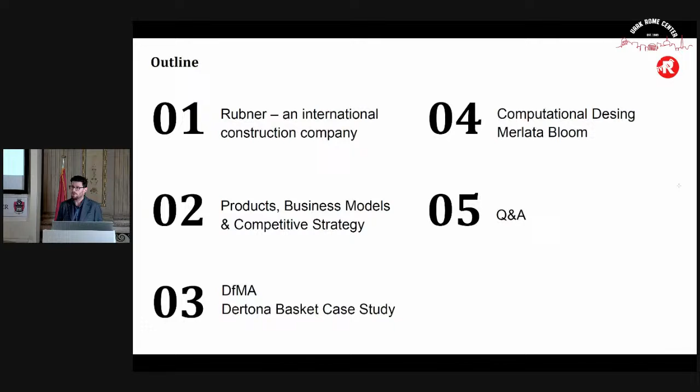The first one is the sport hall of Dertona Basket, using the DFMA approach of design. Then we will have a brief look at the Merlata Bloom, the largest shopping mall in Europe, recently completed in Milan, where we took part in the design using a computational design approach. And then I hope we can have a fun part with questions and answers.

Let's start with the Rubner Group. Rubner is a group of 24 different affiliated companies working in the field of timber engineering in Europe, although we are an international company because we are quite active in the entire world. These 24 affiliates are placed in 15 different locations and 4 countries. We are more than 1,500 employees, and we have a total turnover of more than 400 million euro.

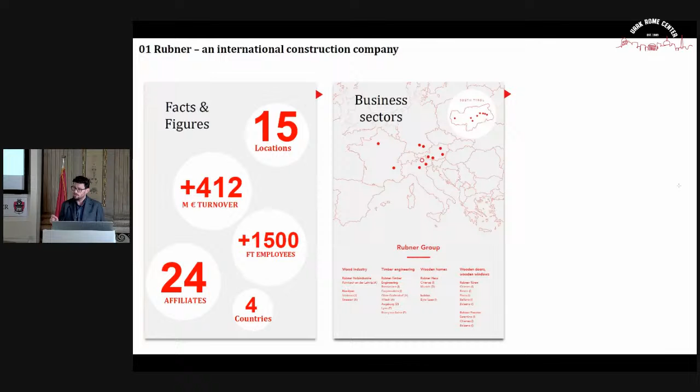These 24 different companies are grouped into 4 different business segments. We have the first part, the wood industry, those companies that take care of the raw products. Then we have the sector of small single family and double family houses, namely residential application. Then there's the part of the company that produces finished products such as windows and doors, very high quality level windows and doors.

And then there is probably the most interesting part of the company, not because I'm working for that, but because of the type of structure we take care of, namely tall buildings, large span structures, iconic buildings, or whatever is called timber engineering. What is extremely interesting and makes us unique is that the 24 companies, although they make business from a standing-alone point of view, must be profitable.

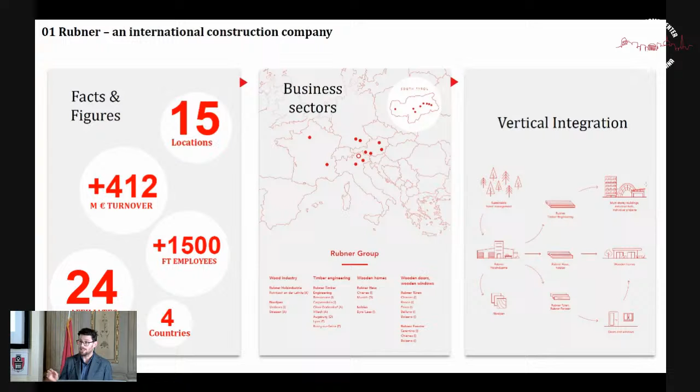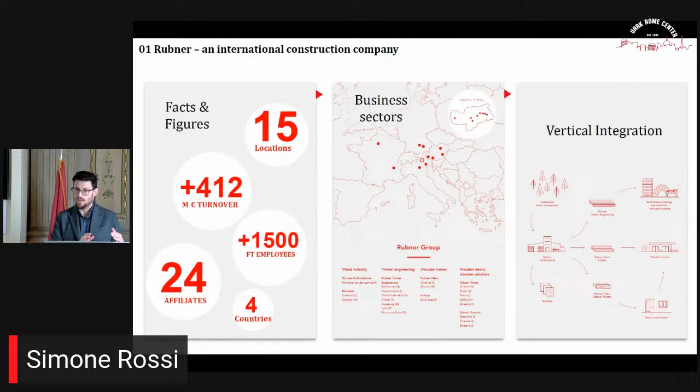We are vertically integrated. Here you have a small picture showing more or less how we work. We take care of the forest, we manage it, we own it, we take the log, we produce the lamination and the raw material, and then all along the value chain, this raw material is taken up to a finished configuration: building, window, door, or whatever.

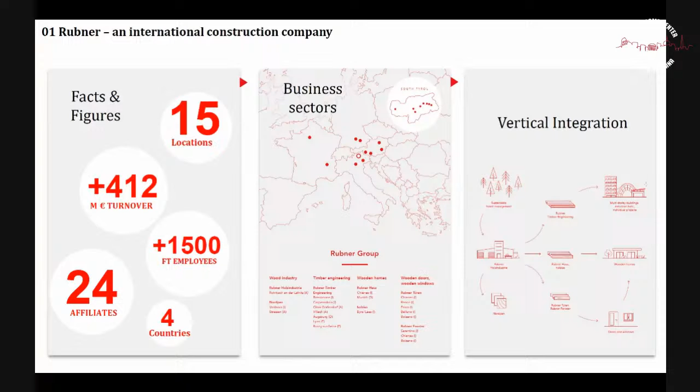What are our main products? So basically, the raw material is wood, timber, engineered, made of larch or Norway spruce. We produce glulam beam, GLT, cross-laminated timber, and then framed elements. These three base products can be combined.

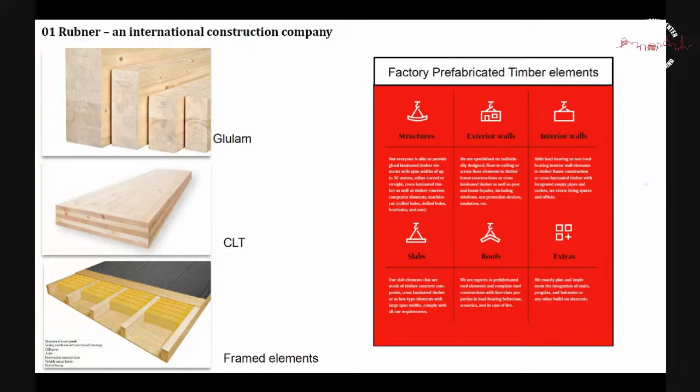We combine them into different applications in the factory, in the workshop, creating a semi-finished product, a kind of kit for structure, for exterior wall, interior wall. Namely, a staging between the final configuration and the base product. This activity is pursued through 4 common steps, generally speaking.

We start working with architects or the design team of the client with the conceptual design, working shoulder by shoulder. Then we further develop the design, the planning, the project management, the production, direction, and the installation. This activity that works on those 3 base products is basically articulated toward 4 main business models. These are the more important business models for us.

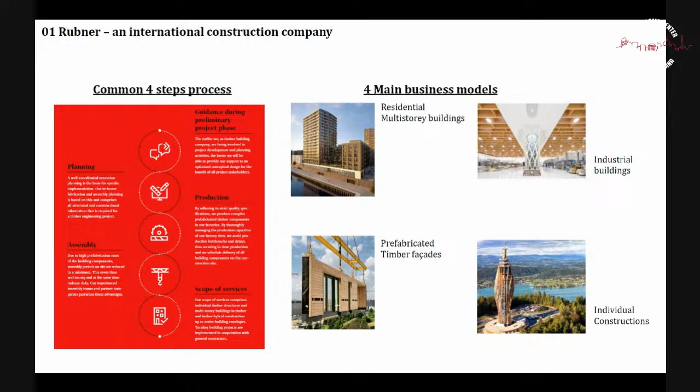Residential multi-story building, and the picture you are looking at is the tallest timber building in Germany, recently completed in Hamburg. Then we have industrial building. This is the headquarters of Tetra Pak in Italy. We have prefabricated timber facades and also individual construction.

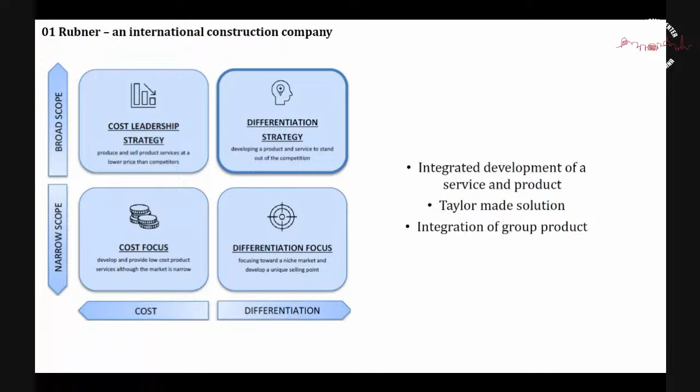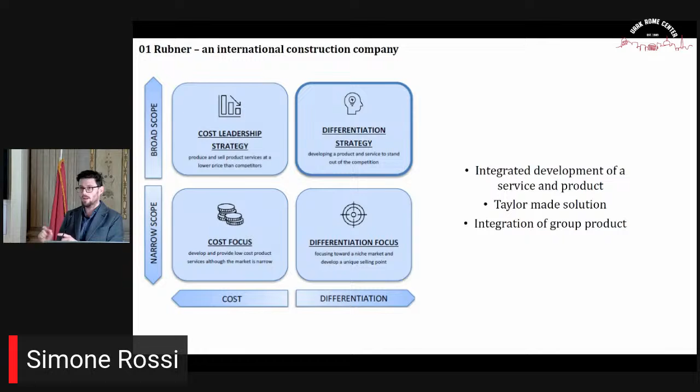From a strategic perspective, maybe it's not that common as a description. Using the Porter generic model, we as a company pursue our core competencies through what is called differentiation strategy. Each company is making business addressing 4 perspectives. We are looking at differentiation strategy because we are quite good in integrated design, in developing tailor-made solutions, addressing the client expectation, and also the integration of the group.

What does differentiation strategy mean? It means that we are targeting a wide sector of the market. That is why we are active in the entire world, but with a different approach. We are not a mass producer, although our production is quite high, but we try at the beginning of the design to understand what the architect, the client, the design team is looking for, and we try to develop our base product, the kit, to successfully make the client happy.

This is quite high-level as a description, but basically, what do we do, especially in the technical office, the office I'm leading? We work on the conceptual design, the preliminary design, the engineering design, and the final design. What is called integrated design from the beginning up to the direction. In a nutshell, what do we do? We take an idea, start working with the architect, shoulder by shoulder, and try to make it real.

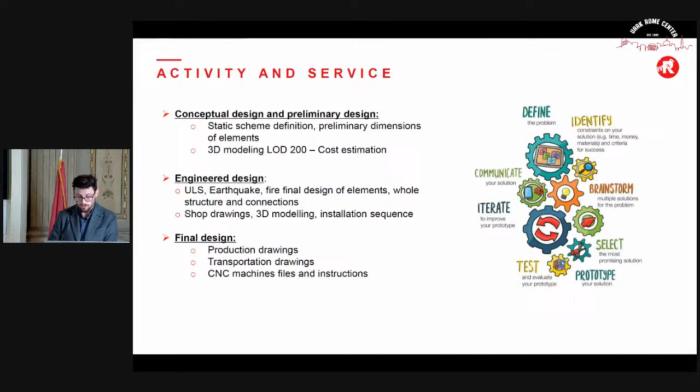And that is the picture of... there is a delay.

Okay, sorry. We try to create what the architect is looking for. That's the Azerbaijan pavilion we developed for the Expo 2021 in Dubai. Looking at the picture, everything seems quite easy, but it is not, because we are a designer, a producer, we install it, we help the client to maintain the building.

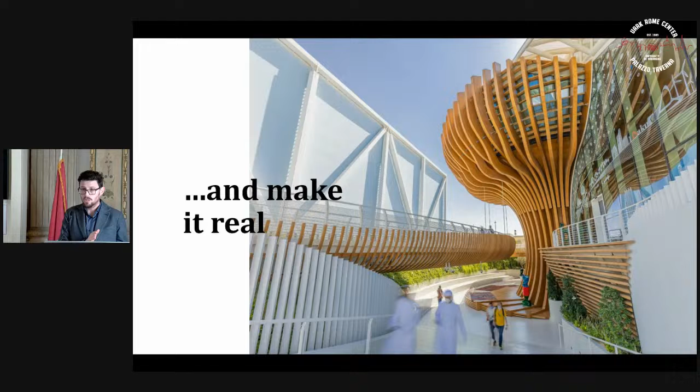So I let you imagine how difficult it is to take products through the entire world. It is physically a nightmare because of customs duty, specific regulations. You have to fit everything in a container. So although the pavilion or the structure is quite large and tall, you need to split every piece into smaller pieces, at maximum 11 meters long. We also need to design every single nail, steel hardware, whatever there is in the building.

Yeah, okay. Sorry, there is a delay. I'm looking at the screen.

I apologize. We need to design everything because, as I told you, we are developing a tailor-made solution. We cannot use off-the-shelf hardware. There are thousands of different producers that produce angle brackets or the like. But if Rubner would like to address the client expectation, the architect expectation, we need to design also the very small base plate or steel hardware.

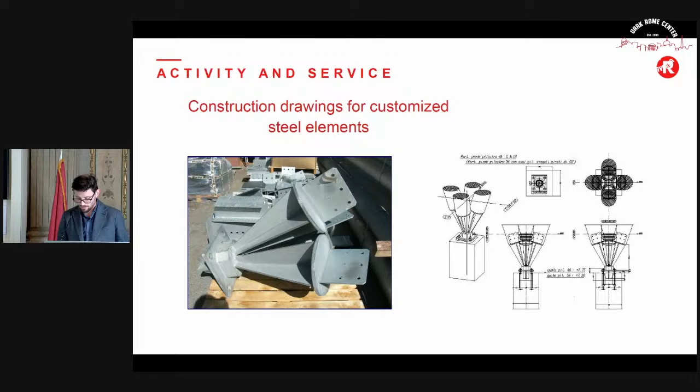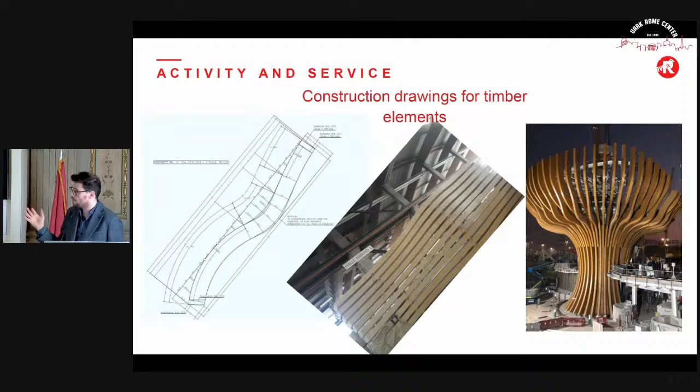Not only that, there are limitations in the production. That is the pavilion we have just seen. It consists of several different branches, each of which is different from the other. And the curvature of these elements is smaller than the real production capability, because, leaning toward the engineering part of my brain, whenever you bend a piece of timber, you are introducing a stress. And if from the beginning you introduce a stress, you are actually decreasing the load-bearing capability. Thus, there is a limitation.

In this case, many of the branches were too narrow for this limitation. So if you look at the picture, at the pointer, you can see in this zone 3 different lines. The first one was the line in the final configuration, the radius that the architect wanted for the branches, and the other one was the dimension of the raw piece, and then we carved out everything.

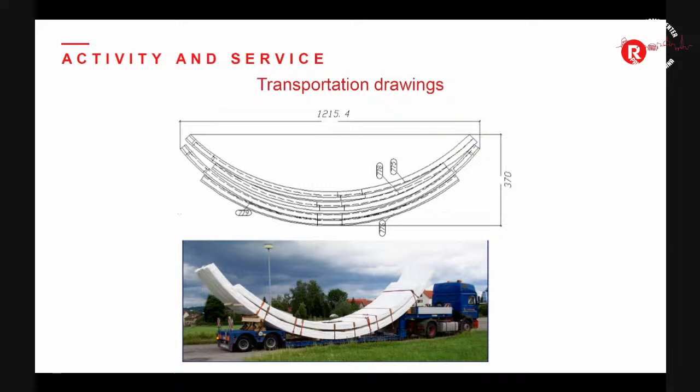This is extremely challenging from the point of view of the drawing, the fabrication, but also from the structural design, as timber is a fiber material, and you cannot cut the fiber, otherwise you are diminishing quite importantly the ability of the piece to take load. And not only that, we have to take care also about the transportation, because you cannot design the building without taking the piece out from the factory and onto the road, on the boat, or sometimes with the helicopter.

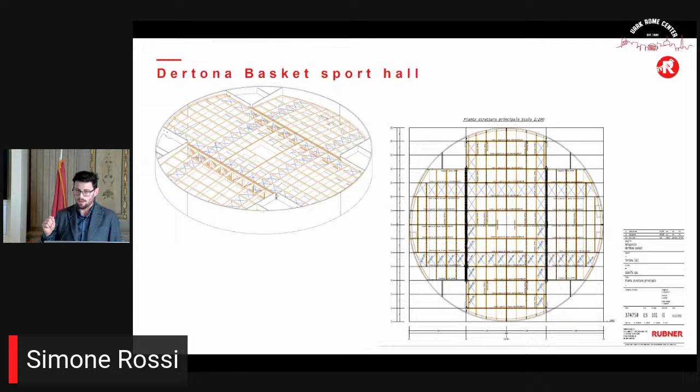Okay, first case study. I'm going to present the Dertona Basket Sport Hall. We developed it with the design for manufacturing and assembly approach. It's a quite interesting structure, and it is going to help me explain how we work, how we can trace everything, how we can organize everything. You're looking at an engineering drawing. We designed and installed the roof of the sport hall. It's a dome, 80 meters in diameter, so quite big. That's a screenshot of the drawing we exchanged with the client, so it is physically a part of our design.

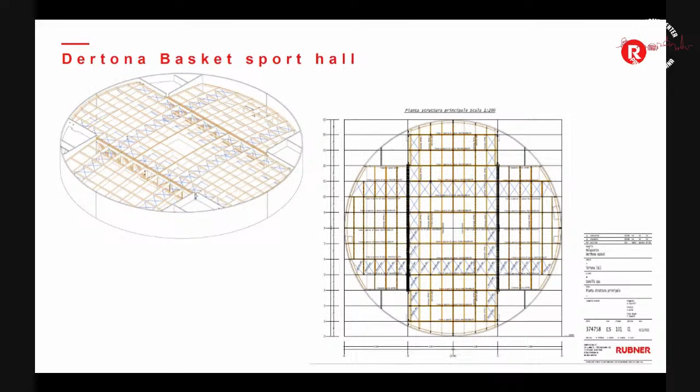The roof consists of 2 main trusses. Here on the left picture, you can see them here on my pointer, that are taking the load of the entire roof. We have 3 bays. The central one is 33 meters large. How do we get to the final project? Through the drawings, but also the structural calculation.

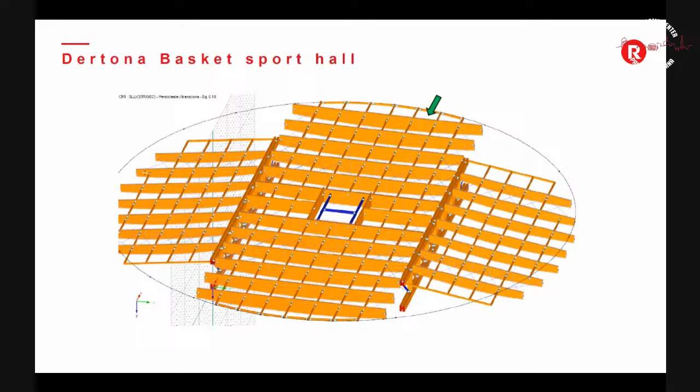This picture is showing you the final finite element model that has been quite complicated to correctly model and consider the interaction between the foundation, the concrete shaft, the concrete shell, and also the roof, as the Dertona Basket is playing in Pavia, a quite seismic prone region in Italy, thus the seismic action led the design. Another picture of the finite element model, so you can also see that there is quite a superposition between the structural design and the drawing design.

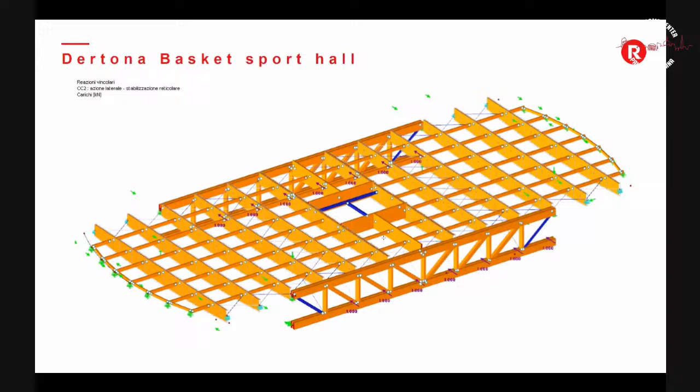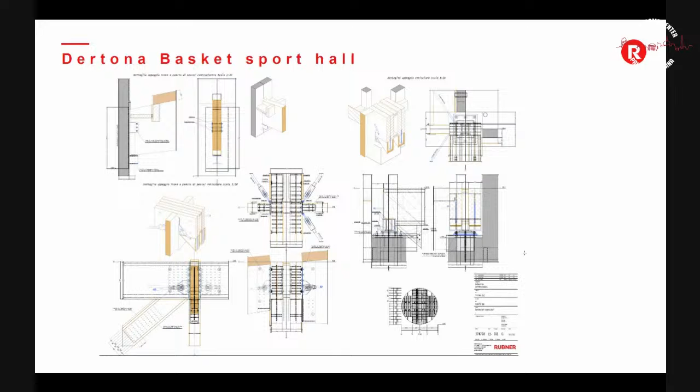This activity ends with the development of a 3D model that is not actually only a 3D model, but is what we call a digital twin. You are looking at the shape. I took a cross-section, and you are looking at the real structure. But this is a model. It is a pivotal item for our activity because it is used to take engineering drawings to the client, so you can extract the drawing, but it holds all the information, not only for the timber, because it is used for the clash detection, to order all the material, so make the bill of quantity.

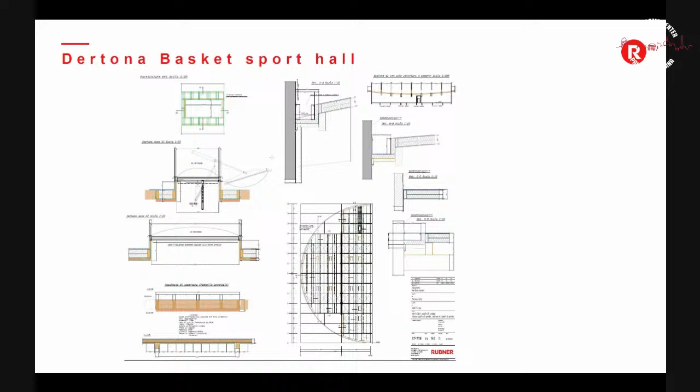Is this a sort of BIM or is it more than a BIM model? Actually, it is a BIM model. We use a proprietary software that can communicate with the CNC machine, but it holds a lot of information, such as color, strength class, type of timber, when you need it on site, what is the name and family name of the element, everything. That is why I call it a pivotal element. And thank you for the question.

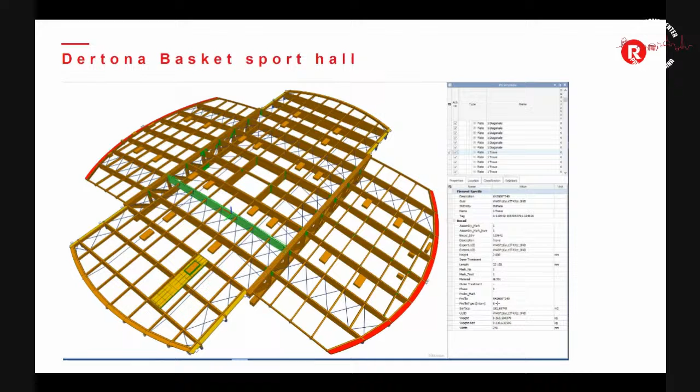Here you have an example. This is the final configuration of the model. I highlighted this green beam, and it's not that big, but on the right side, you can see that we have all the information about this beam. I can interrogate the model, and I know that this beam is 24 centimeters wide, 2.6 meters tall, 32 meters long, and is made in glulam GL30C. I know that there are five elements in the building of this type of beam, and also the assembly mark. It is not only used for the installation, but also for the production.

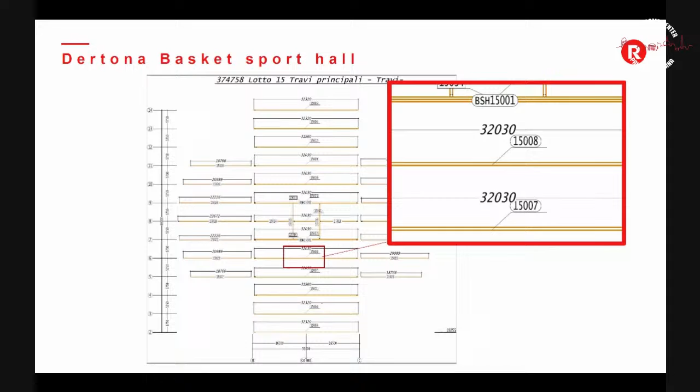That's an engineering drawing. If we look at that beam, here you can see that that beam has a positioning number 15008, and this is needed to instruct production to create that beam. So we need to provide our production with what is called a press bed. Press bed, or Pressbetten in German.

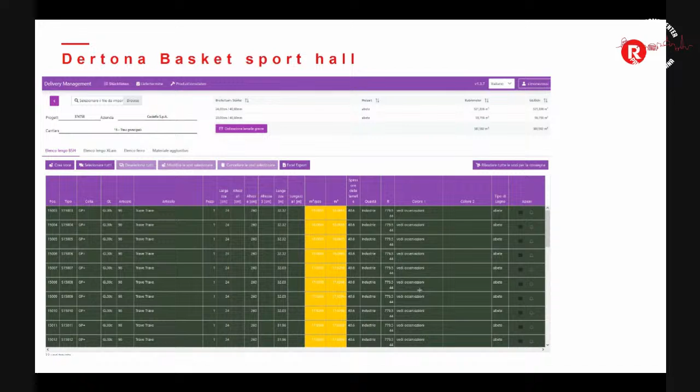So namely, you need to instruct the production what is the shape of the beam, how long is it, how much does it weigh, and also in our logistic system 15008, you see here, once again, I know the type of timber, type of glue, how much does it weigh, how long it is, when I need to have it on site. So everything is taken under control with this pivotal element.

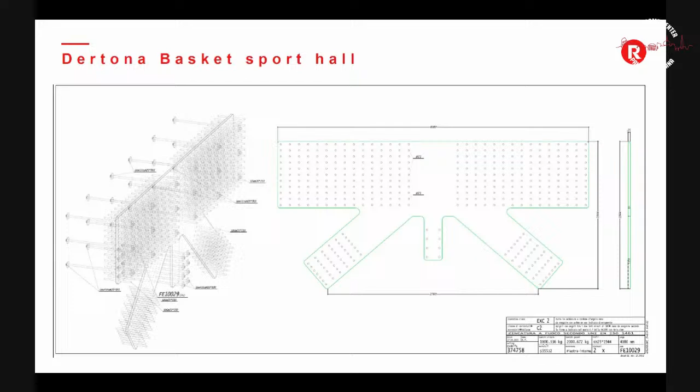But not only on timber elements. We need to do the same also with the steel hardware. You see that is the central steel plate for the truss. Maybe it's not that easy to read it for you, so I can help you. This small guy is 4 meters long to connect the two pieces of the truss, and it weighed 1 ton, 800 kilograms. That's the digital representation of the element, and I took a picture of it.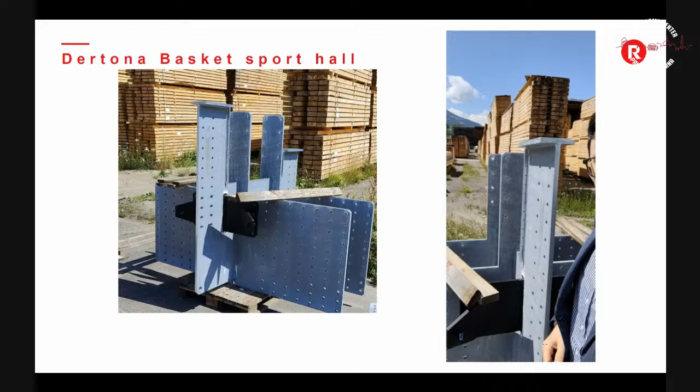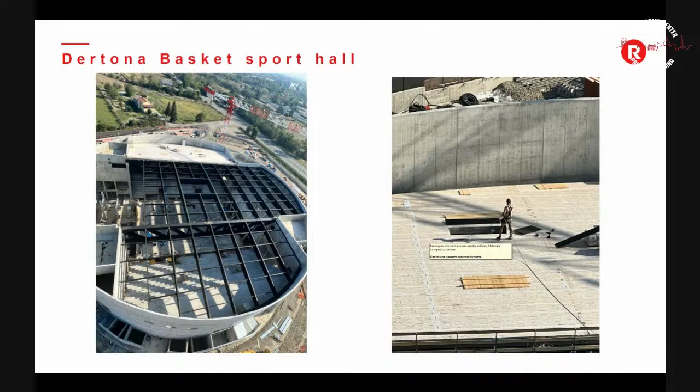Then everything is taken on site, assembled, then we tilted up the truss and put it in its final place. I have a couple of pictures in order to make you understand and feel how big it is. So that is the dome. And if you look at the pointer, I just took a snapshot of this zone. So here we have our carpenter working on the roof. So you can physically feel how big it is. And finally, a small video of the erection site that one of our carpenters took during the installation.

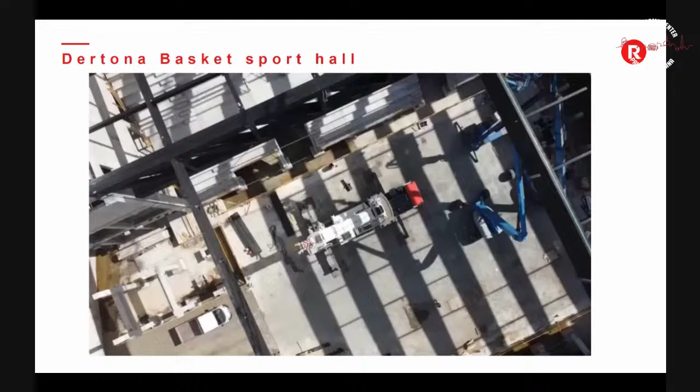While looking at it, we always struggle at the beginning of the design because usually we get on site later than other contractors, and you need to agree with the partner on site about the lifting equipment. So you need also to take under control the weight of the element and how far the weight is from its final configuration. It's not such an easy task actually. And although it probably seems a detail, it is not.

Okay, other example. I'm going to present you the Merlata Bloom Milano in Milan. This is the largest shopping mall in Europe. We have been quite lucky, let me say that, to work on it, although it has been quite a nightmare. We worked on it 3 years, and we addressed the final request of the architect and the client using a computational design approach. But first of all, I would like you to see the beast, or the snake, let me say that, because there is this delay again, sorry. What can I do? Oh, here we go.

That's the shopping mall. It consists of 2 pieces, 2 big buildings, and we designed and installed the Winter Garden, the gallery connecting the 2 buildings. You see this part that is quite big, but one of the biggest headaches we had is that this part of the structure is overtaking the A4 motorway, the largest motorway in Italy. So we had to install and take care of the safety of the people on the building and also the cars underneath while installing it.

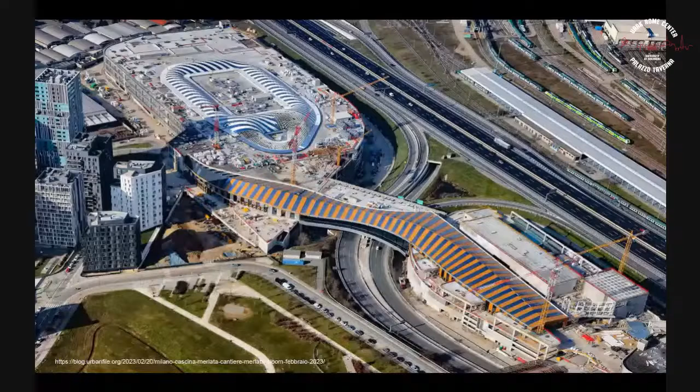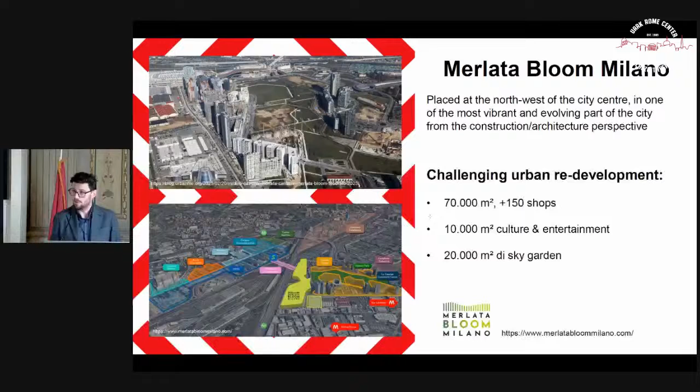A couple of information. This shopping mall is placed in the northwest part of Milan, close to the Expo 2015 zone. That is quite a vibrant part of the city because a lot of construction and architectural activity is taking place there. As I told you, the building is quite big. A couple of numbers I took from their website. The building consists of 70,000 square meters of shops, 150 plus shops. 10,000 square meters are dedicated to installation, culture, and also entertainment. And then we have also 20,000 square meters of sky garden. Probably for what is usually done in Europe, it's quite a big and massive activity. It's larger than normal.

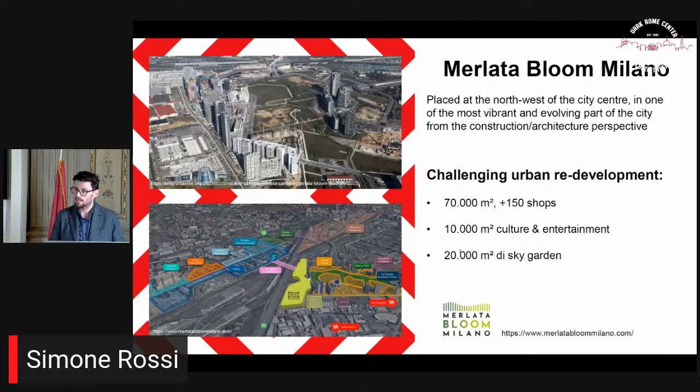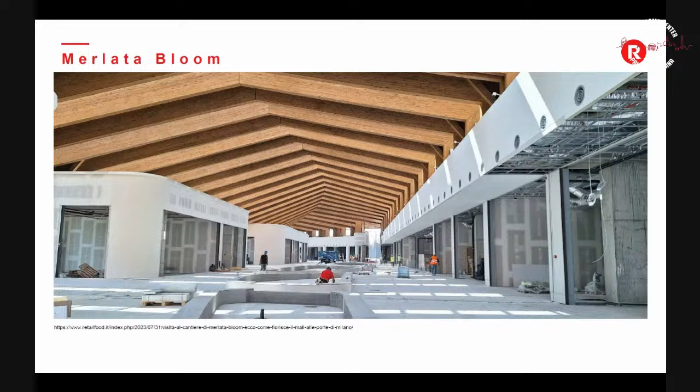But more important is the shape, because if you look at the projection in plan of the building, we will see that we have a double curvature. And then if you look at this picture, we have the ridge line and the gutter line that are going up and down, but not consistently. Why is it so important for you to understand that? Because if you take 2 portal frames, place them one close to the other, and then you change the inclination of those elements, and then you consider projecting them on a curve, you end up with a surface that is not actually a surface.

It's a kind of warped surface to be covered with another piece of CLT. So not that easy at all. I can give some numbers, some key facts. The gallery is 300 meters long. We have 106 three-hinged frames, each of which is different. So 106 single pieces with a maximum span of 37 meters.

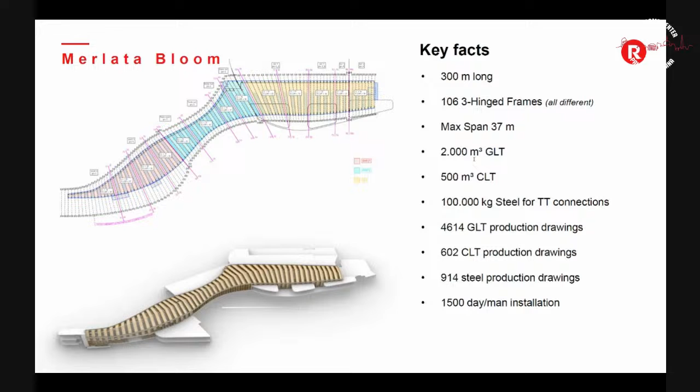We used a total of 2,000 cubic meters of glulam. Just to give you an idea, one full truck can load 50 cubic meters. So we are speaking 2,000 against 50. I let you imagine how many trucks we moved from the factory to the center of Milan. 500 cubic meters of CLT, and then 100 tons of steel, custom, self-designed brackets for timber-to-timber connection.

To do that, me and my guys worked on more than 4,500 drawings. I let you imagine the effort, the energy, how many pills I took for the headache to develop it. 600 single piece drawings for the CLT, 900 drawings for the steel production. And just to give you an idea, it took 1,500 man-days for the installation.

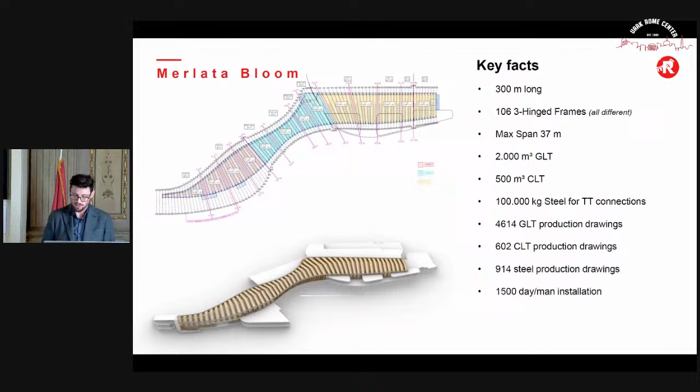If this is not enough, the building is divided in 3 sections. We have the bridge that overtakes the exit of the motorway, and then we have the east part and the west part, because the entire structure is overtaking 2 seismic joints, because Italy is quite a seismic-prone region.

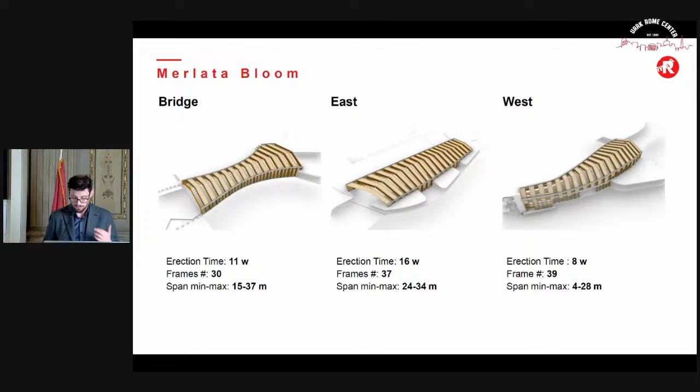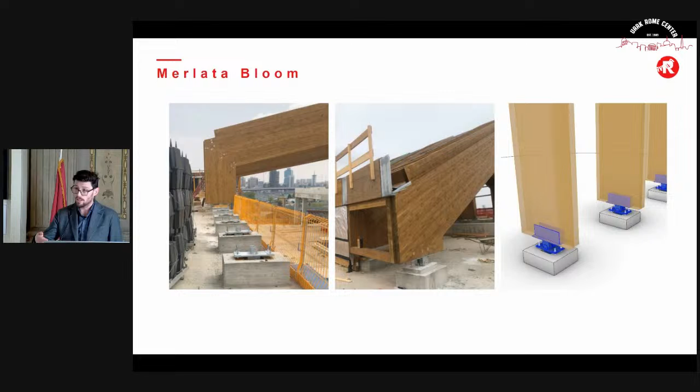This is another picture that is helping me to let you understand what is our work and how we addressed it. Here on the left, you're looking at 2 pictures of the same detail, because we are looking at the base plate of the frame. And then here on the model, we have the typical detailing, but it is changing portal with portal, because I already told you that each single portal is different.

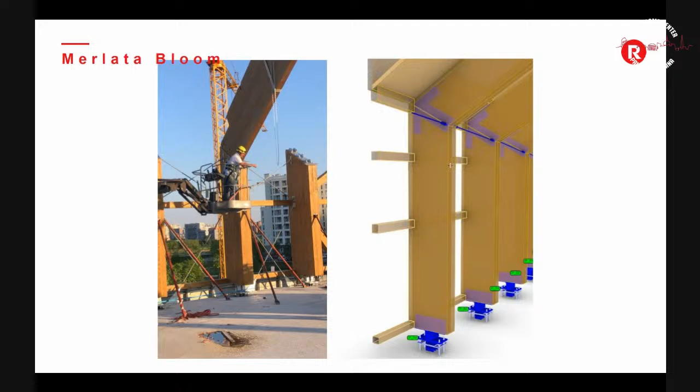Similarly, at the knee, we have a rigid connection that is taking the force from the beam to the column. So we have a typical detail, but point by point, the detail is different. And there is here a picture showing you the gutter line and the connection.

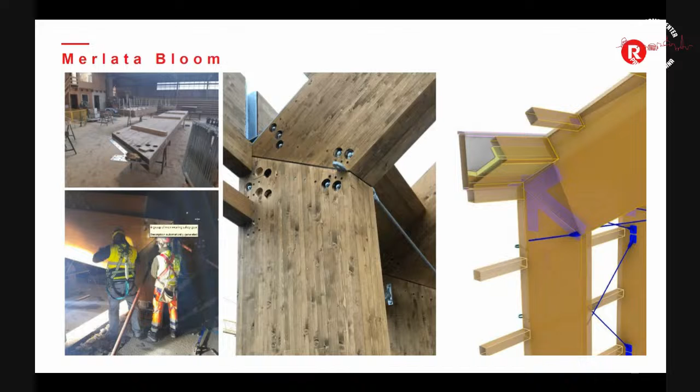And sorry, I forgot to mention that the part of the building, the structure over the motorway, has been installed at nighttime, because for safety we had to close down the exit, but it was not allowed during the day. So our guys worked at night, and I let you imagine the difficulty, because we had some people in the factory to address their questions, and then they worked during the night, and the perspective, the way you feel the structure is not the same as during the day, because you have artificial light, so you have not that same feeling. And this is another picture.

We also performed tests to prove that our design was right. So we physically pulled down the structure to check the deformation, and then a picture of the almost finished structure. So you can feel it's not that small.

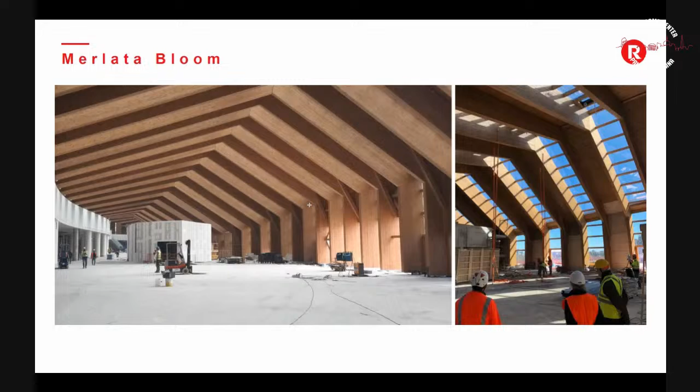Another important aspect of the structure is that since it is a shopping mall, due to European and Italian regulation, everything was 90 fire rated. And that is a quite important item to take into consideration between you and me, namely between the architect and the engineer, because I, as an engineer, love large pieces, large bracing or large beams, but it's not that easy to digest for people like you that have a higher level of aesthetic understanding.

So I decided to put this picture, because what we'd like to do is make the client happy and work with the architect shoulder to shoulder, enriching the experience in between, and probably exchange points of view, culture, and objectives. And we ended up, after a couple of tests, with this solution.

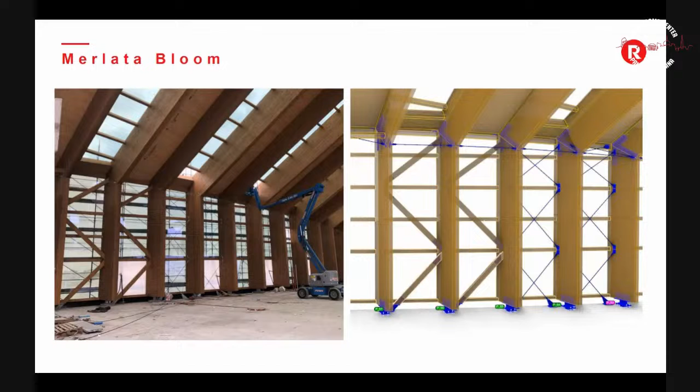So you see the digital model and the reality, in which the architect accepted to have some large, massive bracing in timber, designed to take the load also during the fire event, and then some small bracing that we designed to be lost during the fire event, but not that big to make the facade less prestigious. And finally, how we designed and installed the shadow panels on the roof.

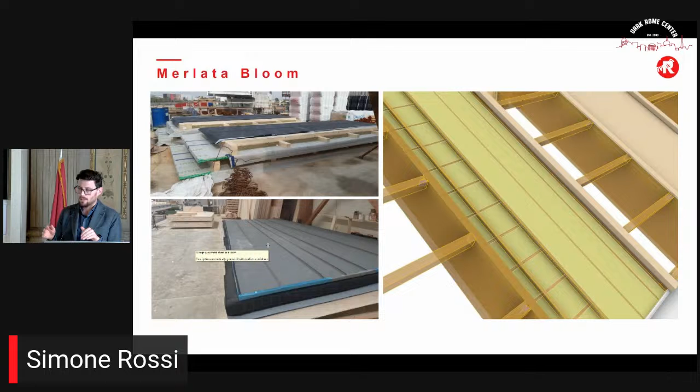We made 3 different tests, because actually to speed up the process of installation, we decided to pre-assemble, to prefabricate the panels in the factory. But those panels, as I told you, were dropped. So we controlled the difference in positioning through a specific method I will let you see, and we checked if physically the panel could deform as much as was needed, not only the timber, but also the insulation, the lintel in between, and the metal sheathing on the top.

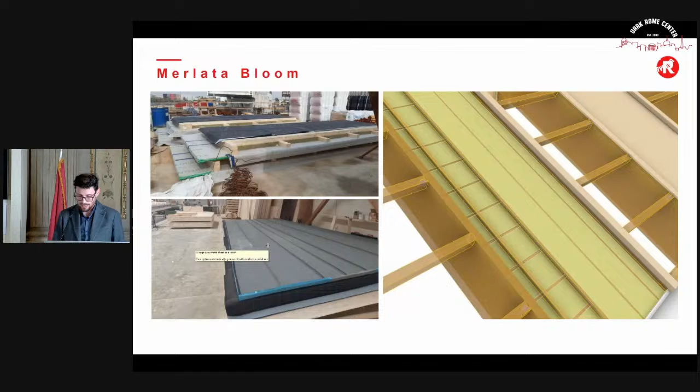I hope you can understand how difficult the design was, but how a structure like Rubner, although we are quite big, can work on such a big project, staying in the time that the contract gave us, that usually is quite narrow. So usually sales guys do not take care about technical and architectural design. They take care about price and installation, but it is something they cannot feel.

So did you use parametric design? Exactly. That is the presentation. We decided to perform 3 different types of tasks using a computational design approach.

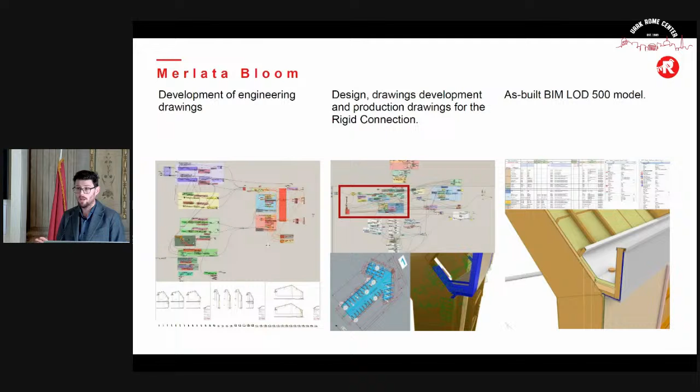And we diminished the time of design and our activity thanks to 3 applications of computational and parametric design. The first one is the development of the engineering drawing that we are forced to provide the client and the architect for the approval to get the green light to produce all the structure. The second one was the structural design, the development of the engineering drawing and the production drawing of the steel hardware at the knee. And the last one, probably most interesting for you and me, for the purpose of this lecture, the development of the as-built BIM model LOD 500, and then we will look at it.

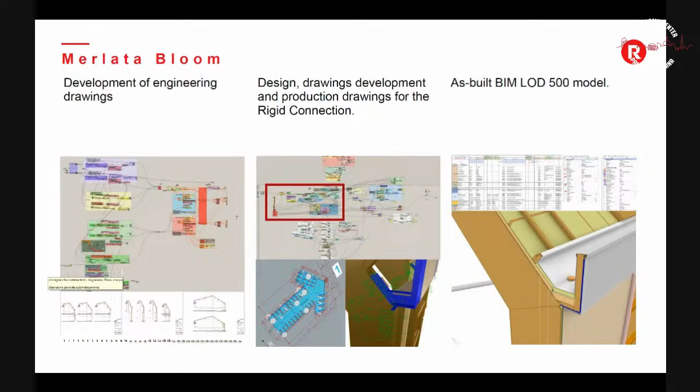First application, here we have some pictures. At the left, I took a screenshot of the script that has been used for the extraction from the model of the cross-section of the portal. I told you that we have 106 different portal frames. I want to make you laugh. Thanks to the main architect, we developed 14 different revisions along 2 years, and try to think how much time and effort, without a real benefit for the company, in putting on a 2D drawing each single portal frame. So we decided to develop a script that was fed with the model, and as an output, we got the drawings, extremely squeezing this time. That is basically something needed. It is a must as a milestone in the time schedule, but it is time consuming.

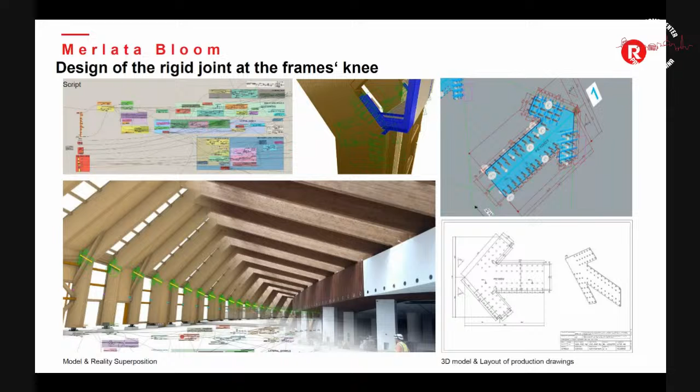The second one, and this was a game changer, honestly, was the design of the hardware connecting the beam and the post, designed for taking the bending moment to connect the 2 pieces. We decided to develop the script here on the left for these brackets, and then the brackets for the gutter, probably halfway through the design, because we were not that sure it was physically possible. And it was something we had to do, because one more time, we have 106 different portal frames. Each portal frame has 2 knees, and the 2 knees are different. So basically, we structurally designed and produced 212 different pieces of hardware. If you multiply it by 10, 12, 15 revisions, I let you imagine how difficult it was.

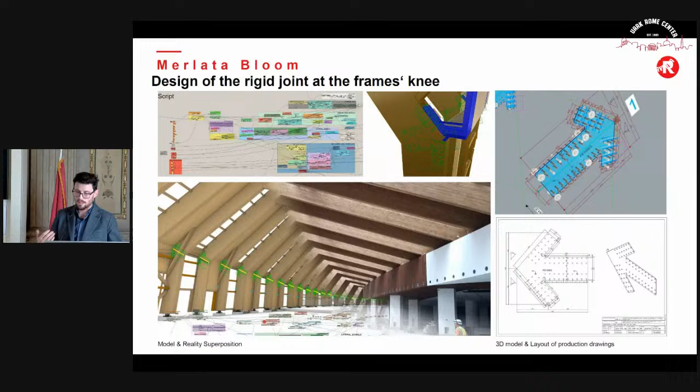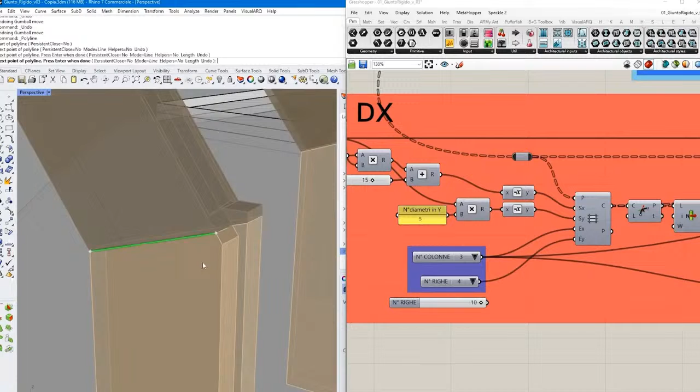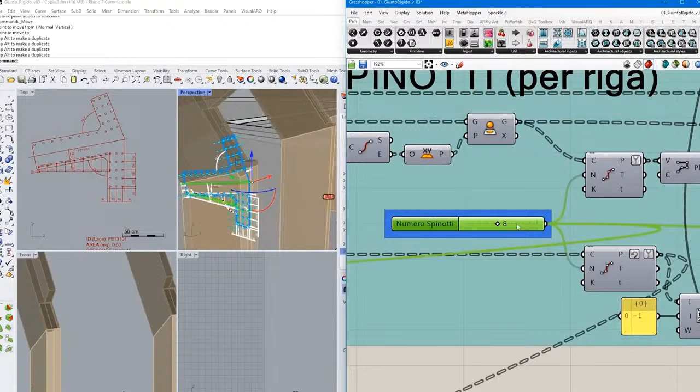So we decided to develop this script, and the script's task was the structural design, the engineering drawing, and the drawing for the production of the bracket. The computational design team developed the script, and now the script works. You need to feed the script just with a vector, an oriented segment, providing physically the conjunction between the post and the beam. And as a result, we got the engineering drawing and the production drawing. But not only that, we included in the script also some standard checks, because I guess you are familiar with the fact that pins, bolts, and screws have a minimum distance along the grain and at 90 degrees to the grain. So we took under control not only the structural design, how many pins we needed for taking the force, but also the limitations given by the standard.

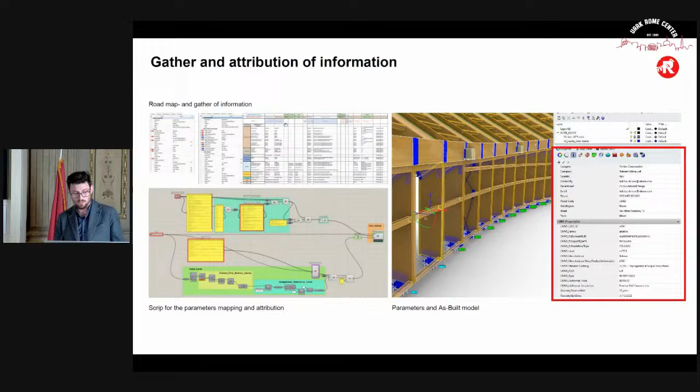The last application, maybe not that fancy, but you can directly feel that this was extremely important for us, was the development of the as-built model in a BIM format with a level of detailing LOD 500 according to the UK standard. So here you are looking at 4 screenshots. The first one was the roadmap and the gathering of the information we applied to the model. The script for the parameter mapping and attribution or superposition. Here you see the final model we delivered to the client, and here a screenshot of the information we have been forced to apply to the model.

A couple of comments. LOD 500 is extremely high, namely the model weighs more than 10 gigabytes, just to give you the feeling. Each single nail and each single screw is included, and not only the screw, but the head of the screw, the shank, and the threaded part. Literally a nightmare. Probably I gained paradise working on this project, I hope so. And the information the client wanted, and it was the first time, and just between me and you, I hope it was also the last: we included what type of timber, who designed it, who installed it, the name of the company, the email address, the DOP declaration of performance, a phone number, street address, positioning number, color, type of finishing, when we produced it, when we installed it, type of warranty, and warranty expiry date.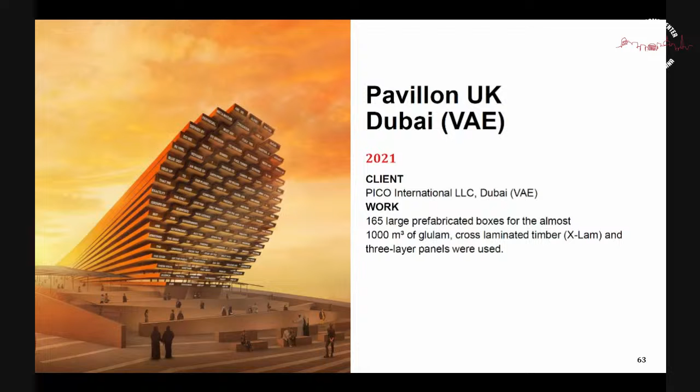This one is the UK pavilion we developed and designed for the Dubai Expo 2021. It's a quite interesting structure. That's a picture taken from the model, and that is the reality.

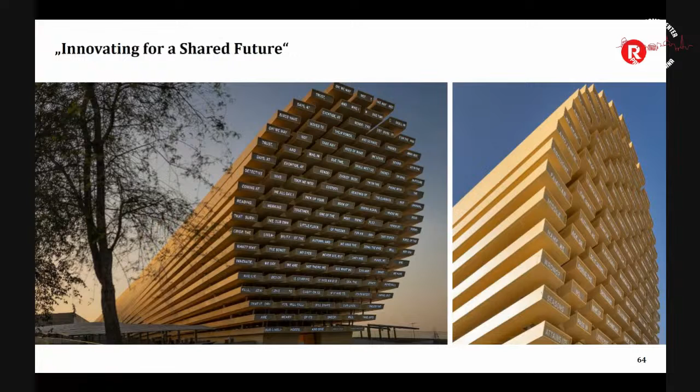The building is quite long, 50 meters long, 21 meters tall. That is the inside of the building. It consists of 20 different stories made out of different cassettes.

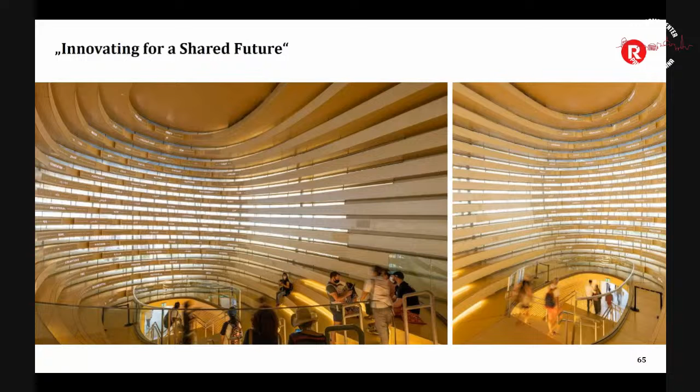And the idea of the architect was Devlin, thanks - I will never forget her, because we were forced to work from home as the pandemic was running, and she was in her house taking tea. Then please cut this part from the record.

And then the other one, we already seen it. Okay, cool, the Azerbaijan pavilion, an extremely nice structure. I like it more than the other one, just from an aesthetic standpoint.

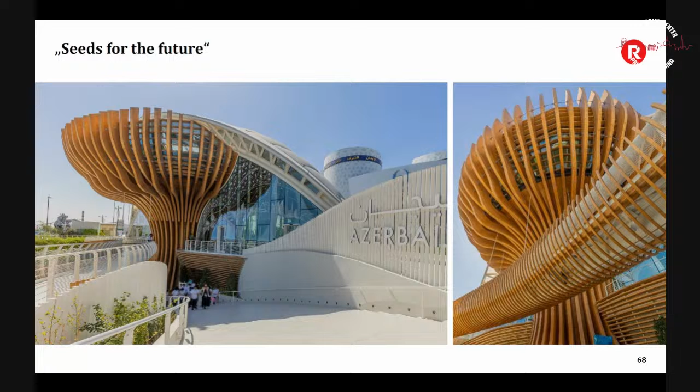I'm showing you these buildings because we use the computational design approach. I think you can appreciate quite easily the positive benefit you get using a parametric or computational design approach with these buildings, because there is a rule - everything can be mapped with a parameter. This is important for us, as it lets you speed up the design process while keeping quality and production under control.

And the last one, which we are going to install next year, everything is on site in Sydney - it's the Sydney Fish Market. If I remember well, Francesco, you saw some pieces. We saw the mock-up when we visited the factory with our students.

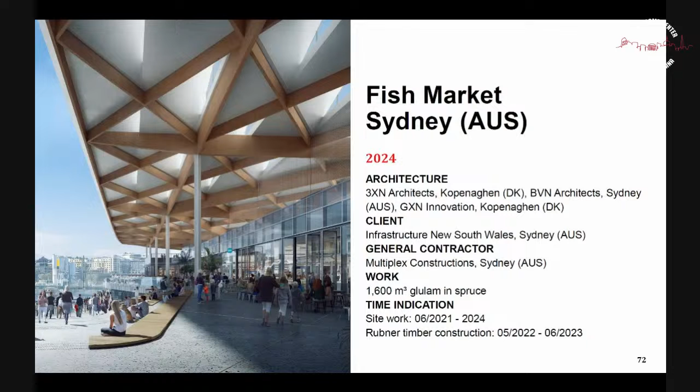There was the Australian people. Yeah, there, okay, right. I know the ship made it safely to sea. Yes, exactly. So that's the picture of the render.

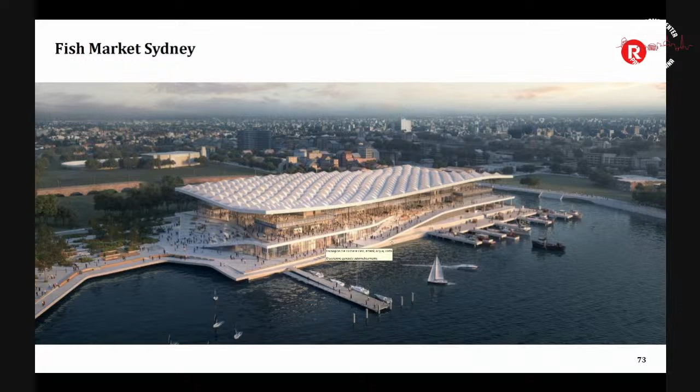The roof weighs, in terms of glulam, 1,600 cubic meters, which the contractor wanted to have on site in one batch. Everything had to be there prior to installation, because we were going to install the roof from the sea using boats. So we designed everything, produced everything, stored it at our company by the port, then loaded everything onto a boat and took it to Sydney.

So from a strategic and managerial point of view, I want you to think about the risk the company took, because you're speaking about millions of euros of goods on a single boat.

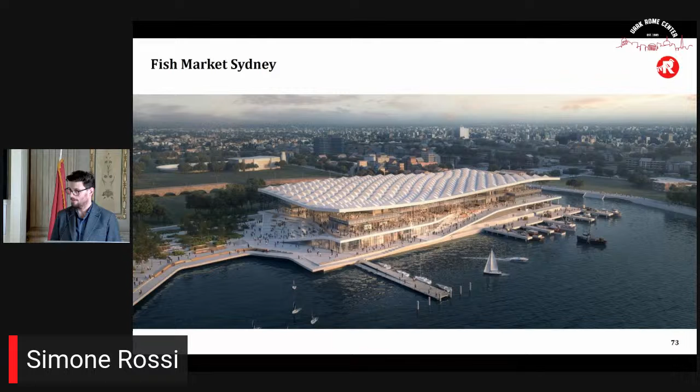So where was the production? Yes, in the timber engineering part of the company there are four different affiliates: we in Italy, one in Ober-Grafendorf close to Vienna, Austria, one in Augsburg, a medium-sized city outside Munich in Germany, and the other one is in France.

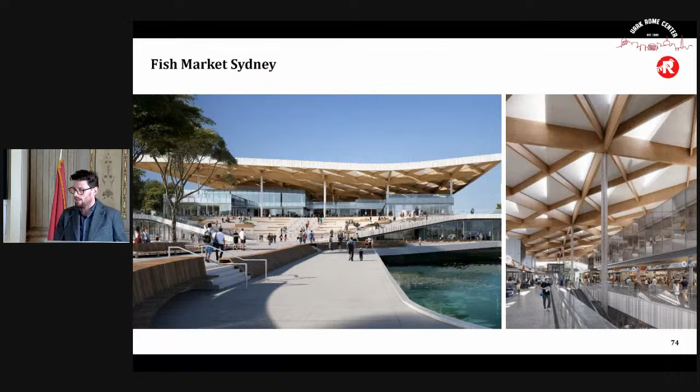From Italy, there are two production lines, one in Italy and the other in Vienna, and the four affiliates take care of the whole world. From Italy, from Bressanone, we take care of Italy, Switzerland, the US, Canada, and Latin America, although in Brazil or South America we're not that active due to building dimensions. Also the Middle East, such as UAE and Saudi, and the Far East with Australia and New Zealand. So everything has been designed and produced in Bressanone.

No, we took - because of the dimension of the beam, thank you for the question, extremely important for me, I forgot it - the beam, differently than the usual approach, was taken to Australia at full length, approximately 28, 32, and 35 meters. So we did not load it in a container, because containers are limited to 12 meters long.

And we took everything by truck to the port in Venice. So not in a container, we stored it in bunches actually, and we put it into the boat.

Another exercise we did on this project with computational design was the installation sequence. We have a pool approach in production because our plot is full, we don't have much space to store material. That means once you finish a beam, you need to load it on a lorry and take it out from the company, especially for long beams.

So we took that piece, put it outside the company, grouped it in a bunch, protected with a foil, took it on the truck, stored at the port, loaded onto the boat, unloaded at the Sydney port, loaded on a small boat, and then installed. Then when you unveil the bunch, you need to find the right beam you need on site to be lifted. My computational designers, a great team, took care of all this process.

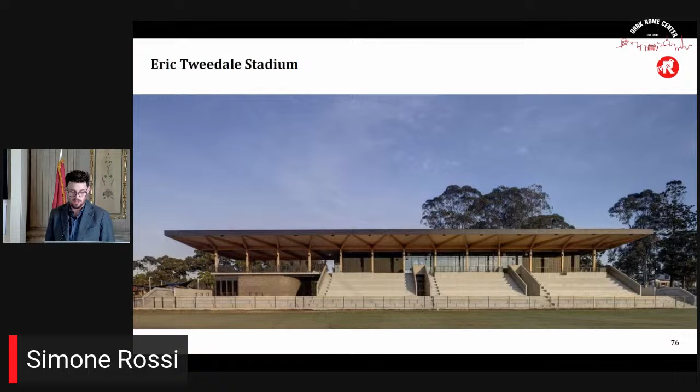Last one, because my time is almost done - I'd like to exchange some opinions - is the Eric Tweedale Stadium. We won a Timber Award prize in Australia. We are quite active there, and although this is not such a big building, I like it for the architecture, and we had a good exchange with the local design team. The aesthetic appearance is extremely high because the local architect wanted to keep an extremely high level of detailing.

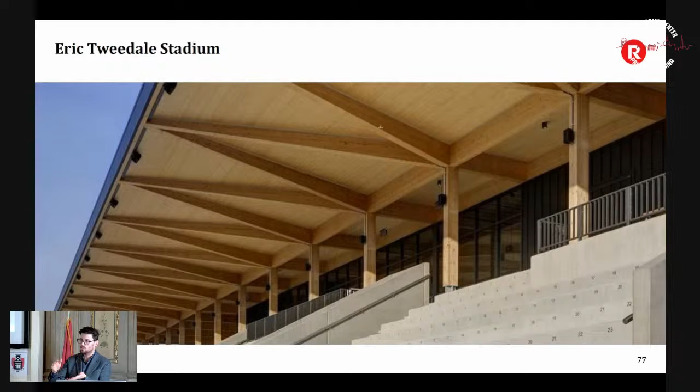Also, you can see the beams are tapered, but actually the cross-sectional dimension, so the structural part of the beam, is higher - he wanted to make the overhang as narrow as possible. So we developed what we call, maybe not in the right way, an inverted beam, where the statical part disappears in the soffit.

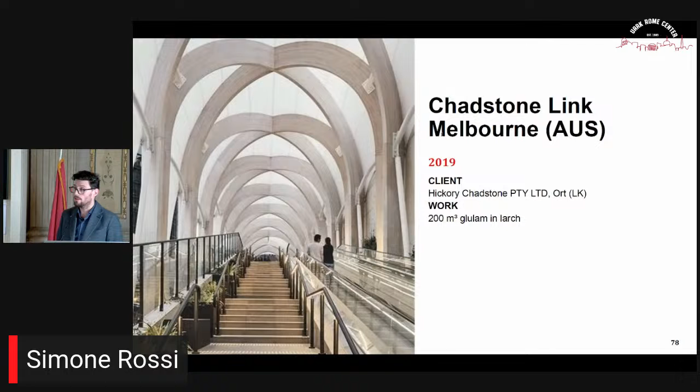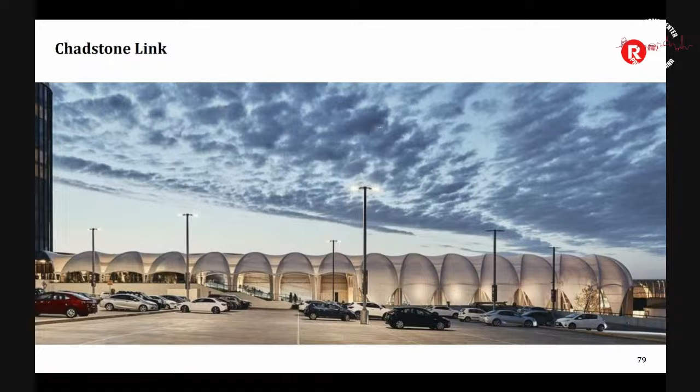Sorry, last one, the Chadstone link. Once again, that's a structure in Australia, a tensile fabric structure. We have some arches that are snaking through two different shopping malls, covered with the fabric. This one is pretty interesting too.